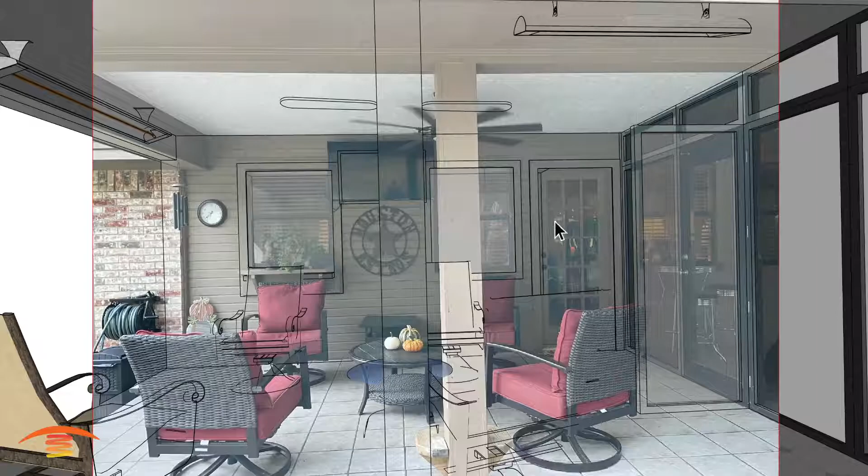So let's go ahead and look at the dimensions that I have. Overall dimensions, I have 16 feet this direction and then 11 feet this direction. I have an 8-foot ceiling height. It's a flat ceiling. And again, just the fan here. Now I've placed the fan so that the blades are 8 inches off of the ceiling, and this fan is a 5-foot, 60-inch diameter fan. And let's see if there's anything else. We do have this post here that I'm a little bit concerned about, and that's about it. Alright, so let's go ahead and turn that off.

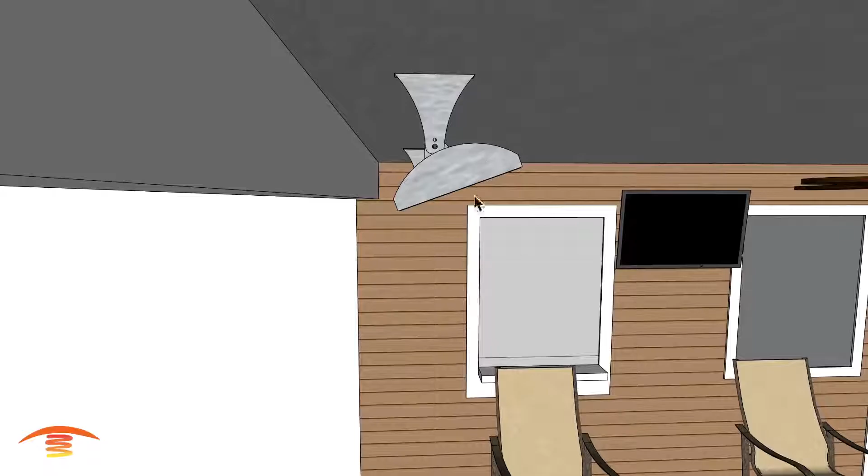So as you can see here, I have two different units. I have a C4024 4000 watt 240 volt single element unit, and I have that placed just in the center of this space, and then 6 inches off of the beam over here, and then I have it at a 20-degree tilt. You can mount it to this beam going across here, point it out, but then you wouldn't receive the clearance above, so that's why I have it on the ceiling.

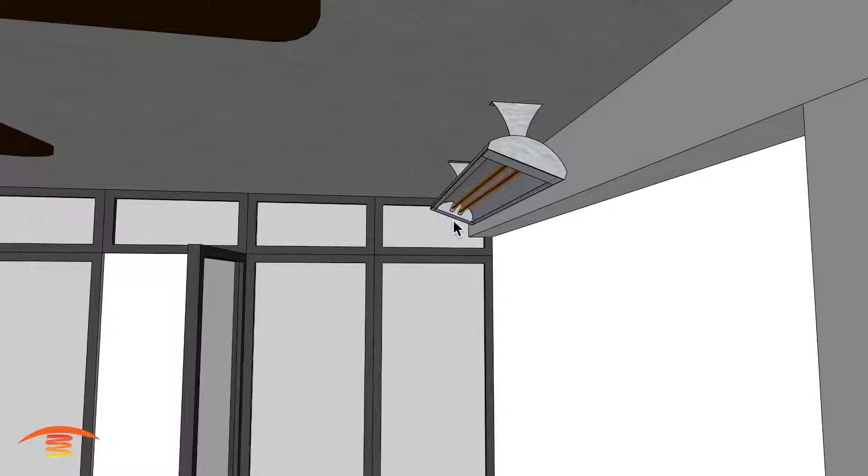And then also this model over here, this is a CD4024, so 4000 watt 240 volts dual elements, and I chose this particular unit because I did try placing a 4000 watt unit here in the center. However, it would interfere with the fan at that elevation, so I couldn't get it to fit there and still meet the clearances to combustibles. So that's why I chose not to use the 4000 in the center of the room.

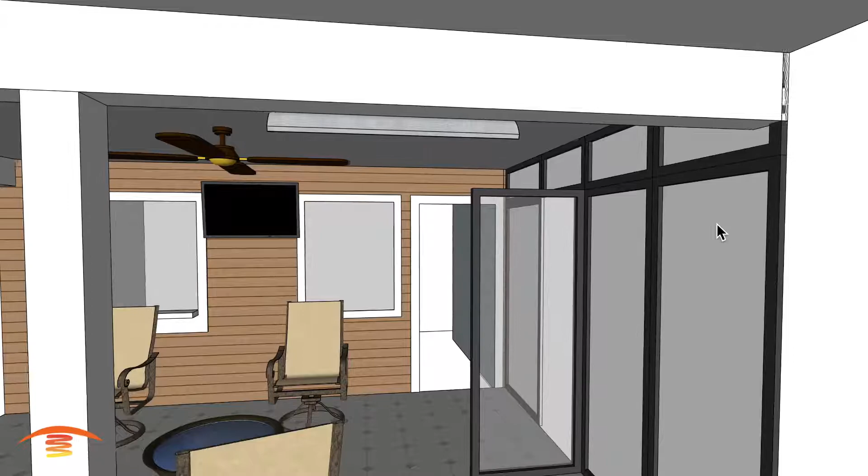I tried placing the 4000 over here, the single element unit. It's too long and it would penetrate the glass unevenly, so I was concerned that if it's a 60-degree day and you had the heaters on, this section of the glass would be heated, and the section over here would be at the ambient temperature outdoors, and there's a potential for some breakage because glass, if it expands, needs to expand evenly. So that's why I didn't choose that model.

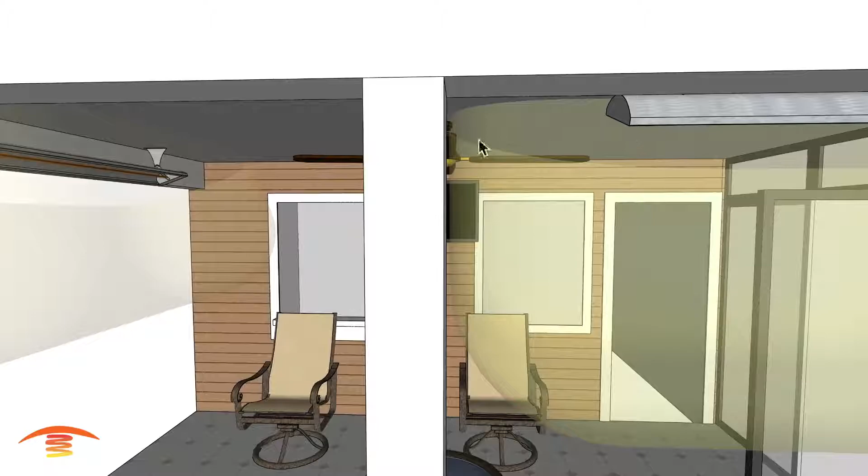And let's go ahead and look at the clearances. So this will be the bottom clearances. I should mention that I have this heater placed 18 inches off of this edge here to meet the clearances to combustibles. From the lower section of the heater, that's 18 inches out, 18 inches around the bottom sides of the unit, 36 inches down, and that's true with the 4000 watt single element as well. And there's no issues with the clearances, you can see.

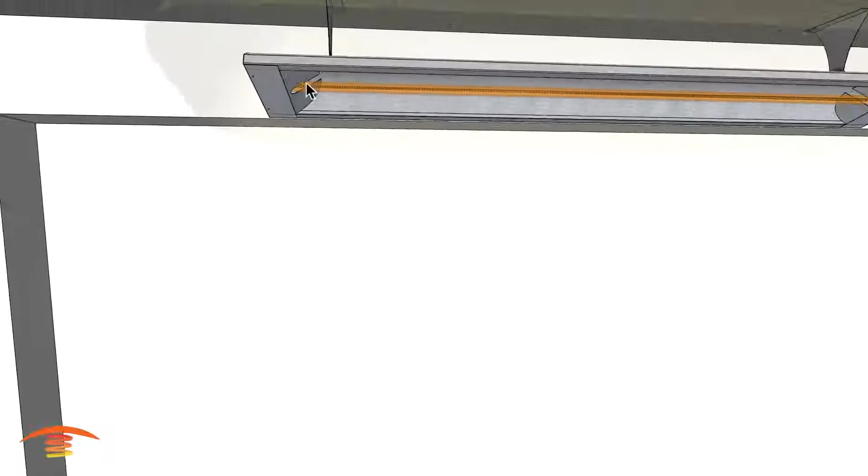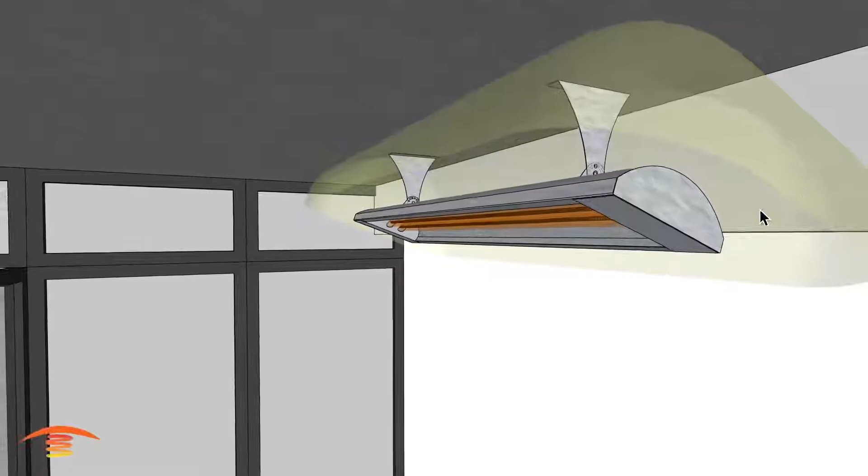And then also top clearances here is 6 inches all the way around the back and sides and ends as well. Okay, and that's true over here. Sorry about that. Let's look at what we got. So we have our 6 inches all the way around, 6 inches behind, and that is why I have that on the ceiling mount. All right. Let's go ahead and look at the footprint of heat. Let me turn that off.

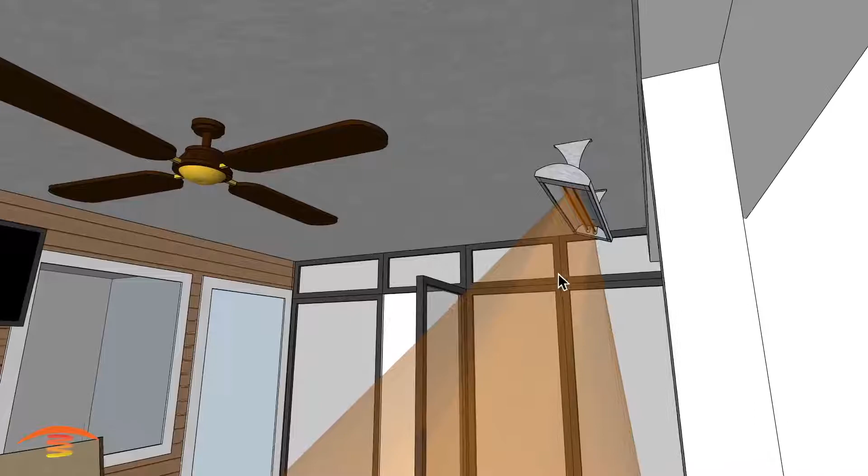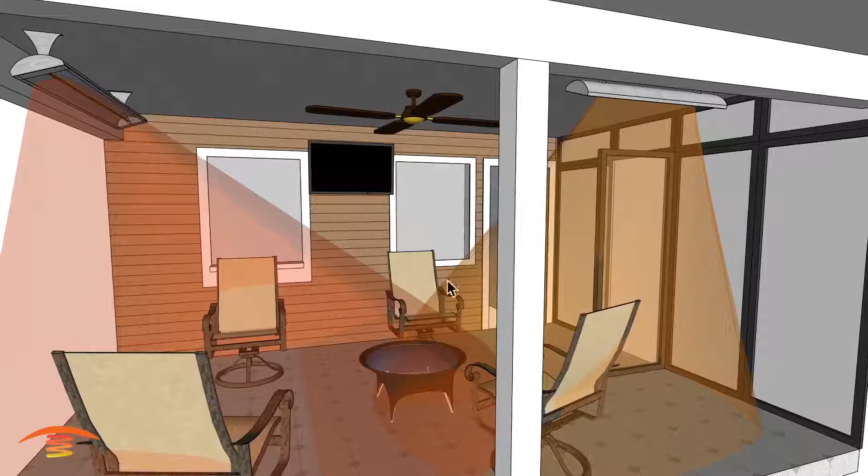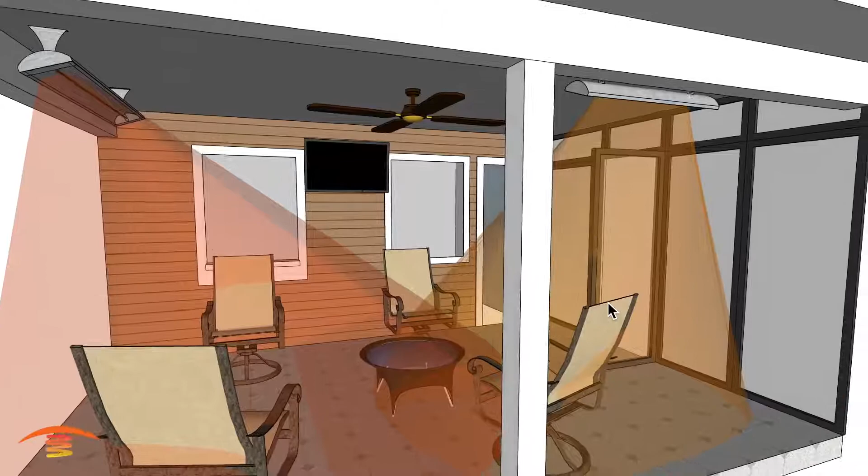Alright, so with the 6000 watt units, and by the way, because this is a dual element unit, you can use a duplex switch, so you could switch one element on, one element off, or both elements on. This unit here, if you wanted to control it in any fashion, you'd definitely want to use a control system, and you could use a control system on both. It's not an issue. I believe with the 4000 watt elements, you could use a single control with a single zone. You'll need to double check on that, but I would recommend possibly using dual zones because they're different units and you'd probably want different intensities.

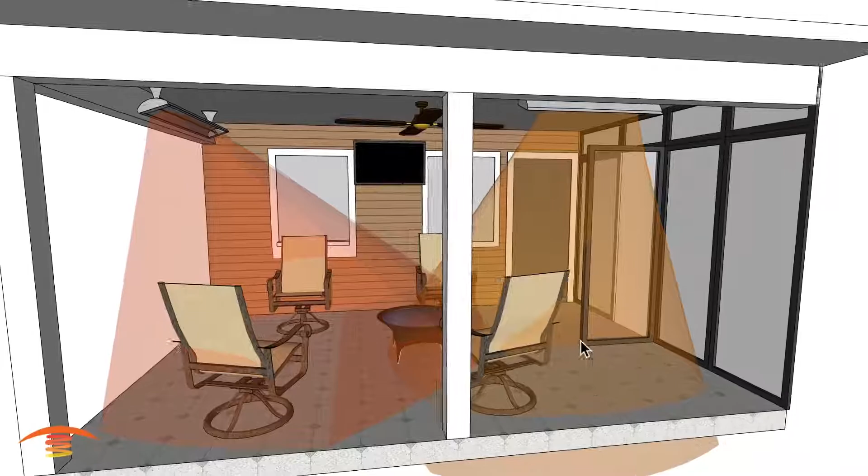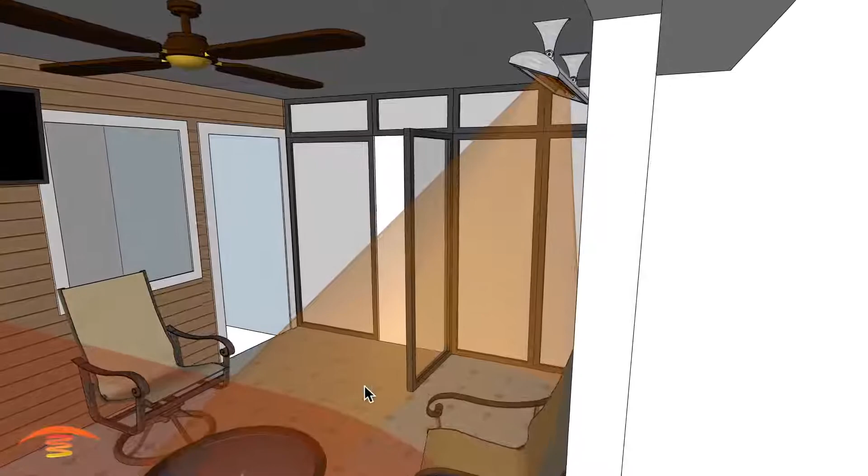As far as the footprint, you can see this footprint is much smaller than the footprint of a larger unit. The amount of heat that comes out is the same. It's just that the ray is more condensed, as you can see here, and so it's more intense. Okay, so this is a light wave. Infrared is producing light waves. These infrared light waves will heat mass, the human body being mass, tables, chairs, floors, anything that's being penetrated by the light wave itself will receive that warm feeling from the infrared light.

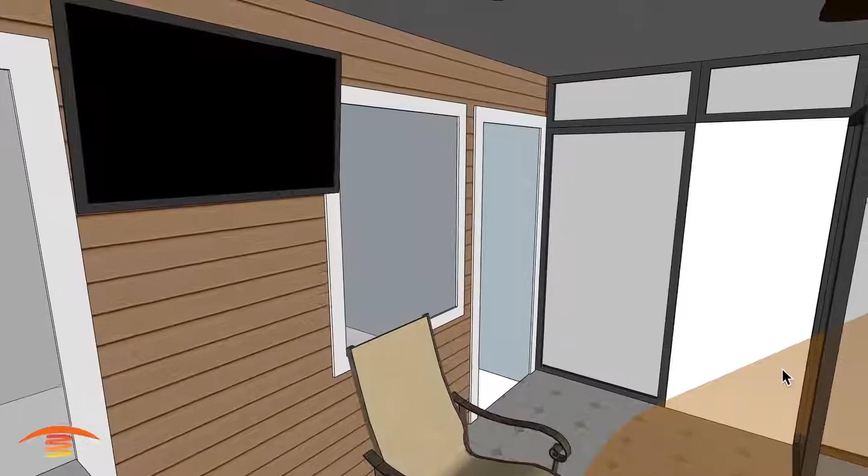You can see the chair out here isn't being penetrated very well, and that might or might not be an issue. However, there will be rays that come out further than the predicted ray and the most comfortable portion of the ray here. It's just that it's not ideal, so I don't want to say that we would heat this area up well, but you would feel some of that ray over here at these 20-degree tilts. Okay. All right, I think that's about it.